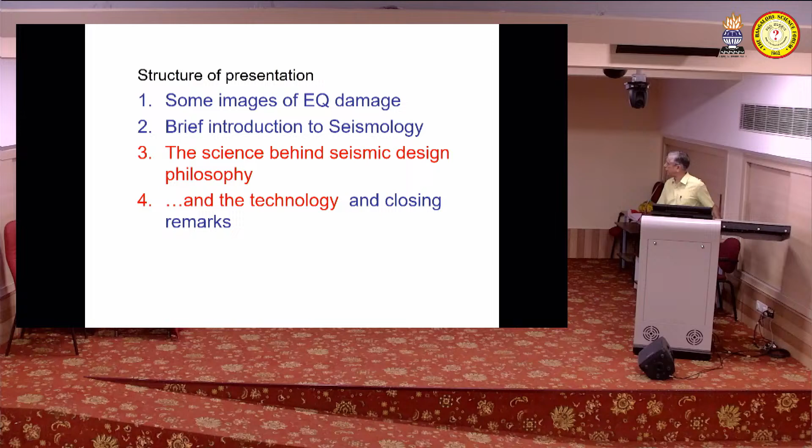So the structure of the presentation for the next 50 minutes or so will be sort of 4.5 parts, not exactly 4 parts. In the first part, I'm going to take you through some images of buildings and infrastructure which have suffered because of earthquakes. In the second part, I'm going to talk about a brief introduction to seismology, why do things happen like that. The third part, I'm going to talk about the science behind seismic design philosophy.

Of course, like any other science, this is also an evolving science. I'm going to talk about that in a little bit. There could be some technical content in the third part. And the last part is, once you understand the science and philosophy behind earthquake resistant design, you need to convert that into technology. After converting that into technology, it has to get disseminated and become useful for society. I'm going to talk about that in the last part with some closing remarks.

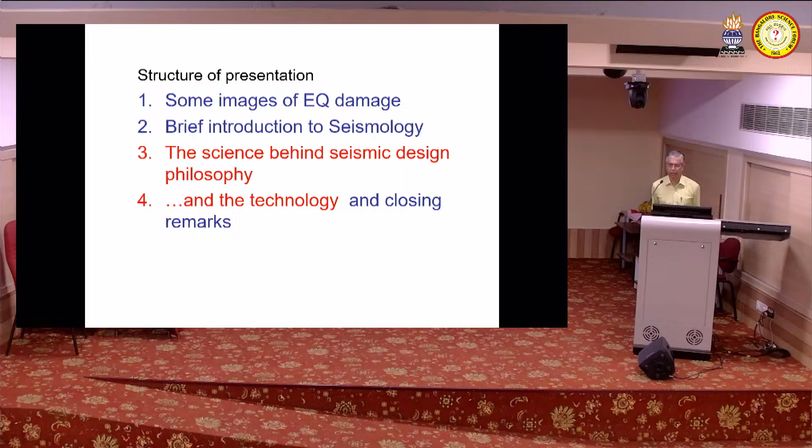So here we go with some images of earthquake damage. I have collected some images from very old earthquakes, from literature which is well documented.

Oldham was a pioneer in studying this, one of the classical earthquakes which happened in the earlier Indian subcontinent. The 1897 earthquake was completely documented by Oldham, Richard Dixon Oldham, in several of his treatises, books, and articles. Here is a picture of a school building, which was, fortunately, available both before the earthquake and after the earthquake, when it had become rubble.

There's absolutely no sign of any usage at all. It is completely devastated. We call that grade 5 damage. You can see the building in the foreground as well as the beautiful bungalow type building in the background. Both of them collapsed in a few minutes, quite literally a few seconds.

In fact, so devastating was this earthquake that it was called the Great Indian Earthquake of 1897. At that point of time, this was supposed to be one of the biggest earthquakes. Even today, it comes into the top 5 biggest earthquakes ever.

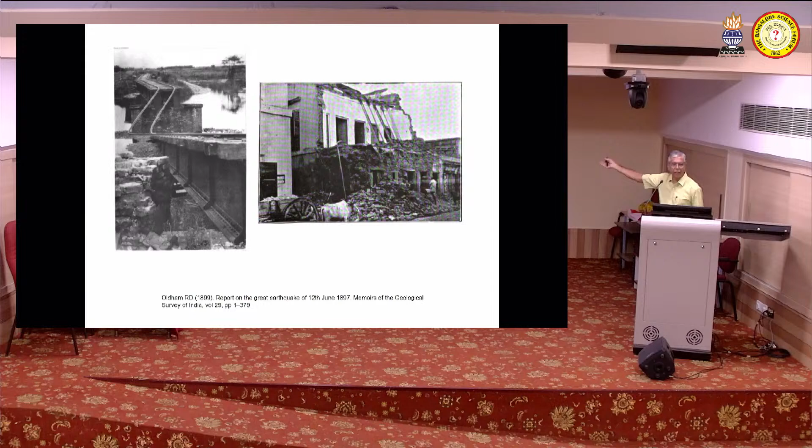He has also recorded quite a few things, and if you read the reprints of his diaries, you find some very interesting and devastating photos of railway bridges completely distorted, and you also see one masonry building completely damaged on the right side.

A few more pictures. The one on the left-hand side is a church, the All Saints Church in Assam. It was a well-known church - we have an All Saints Church in Bangalore as well. And then there was this collector's office, district collector's office, and you can see a beautiful building coming down to the ground. So these were all recorded during that earthquake.

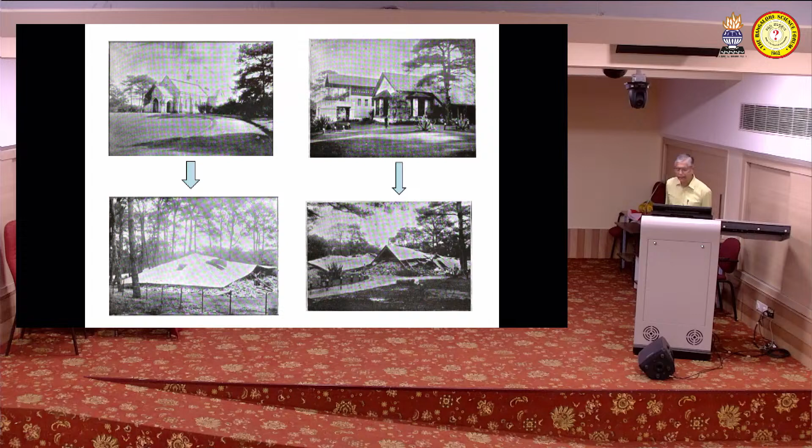Of course, when buildings collapse, they also cause fatalities. This is something which civil engineers should not be doing. I mean, civil engineers should take this as a challenge and then see that these things do not happen.

So now the interesting story comes here. A series of articles were written by Oldham and then later by Bilham and quite a lot of other Britishers documenting this. Unfortunately, in the year 1931, there was an earthquake in Bihar and quite a lot of regions in Pakistan, and of course some regions in the foothills of the Himalayas. A lot of buildings did collapse during the 1931 earthquakes.

They are called the 1930s sequence of earthquakes. During that time, there were railway engineers started by Britishers. One enterprising engineer by name S.L. Kumar took it upon himself, he and his team, to ask why don't we construct earthquake-resistant buildings?

At that point, they called it earthquake-proof buildings. They did a whole lot of studies and tried to understand how buildings behave during earthquakes, and then they tried to understand the materials, the configuration, and things like that. They came out with a very interesting report - in fact, I'm going to leave this presentation here, you can go through this.

There are about 20 pages of calculations and the engineering behind that, the science and engineering behind this. Even now we follow the same thing. His article was titled Theory of Earthquake Resisting Design, with a note on earthquake resisting construction.

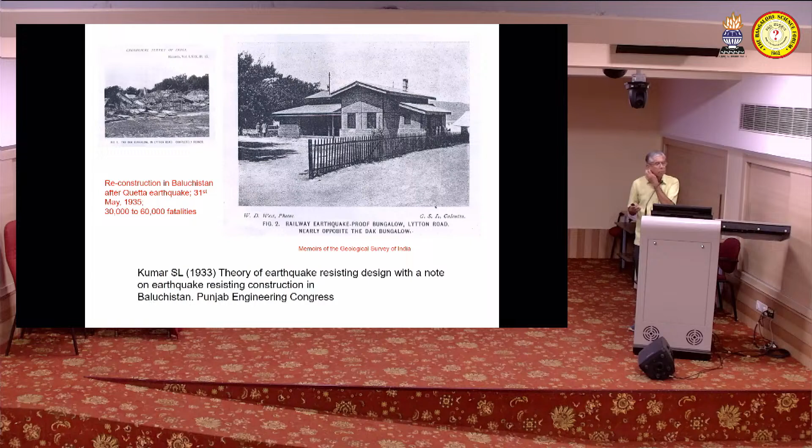Okay, so we quickly come to 1993, almost 100 years later. Of course, after the 1930s earthquake, 60 to 70 years later, there was this earthquake in Killari, the village of Killari in Maharashtra. The entire village just came down to rubbles. Quite a few people died, thousands of people died. Okay, so the entire village, Killari village, came into rubbles. They did not have absolutely any clue that there was something called earthquake-resistant design. This led to one very interesting thing: that masonry buildings are unsafe during earthquakes. At that point in time, the engineering fraternity thought that masonry buildings are the ones which are very, very vulnerable to earthquakes. Of course they are, but it took a very bad name. So that is the 1993, September 30th earthquake. We move on to the next major earthquake in India.

In a way, this is also another benchmark earthquake: the Republic Day earthquake of 2001 in Gujarat. Some statistics: nearing 170,000 people were injured. A lot of people died. People say that almost 90,000 people died. Officially, it was recorded as 14,900 people who lost their lives during that particular event. Later, within a span of another 1 week to 15 days, a whole lot of people died. So probably nearing 90,000 people died.

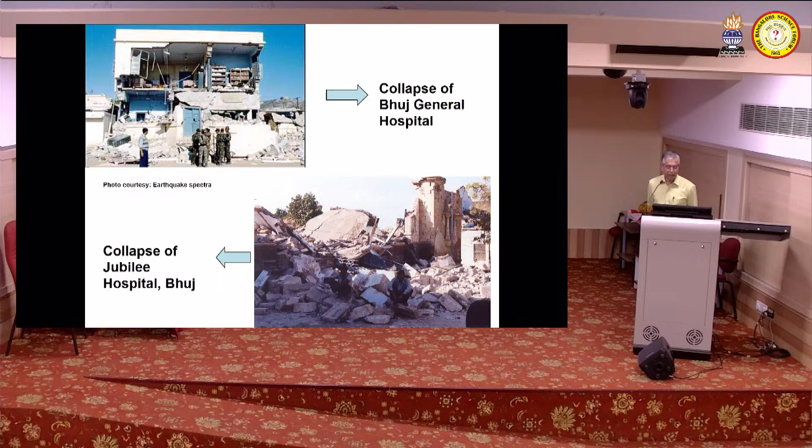Adding to the misery was that a lot of so-called modern structures also collapsed all over Gujarat. The kind of buildings which you say are fantastic buildings—these kind of buildings you see even in Bangalore, contemporary buildings in Bangalore—they collapsed. And these are the typical RCC buildings, they also collapsed. It's not that only masonry buildings collapsed. At this point in time, there was a furor in engineering that, look, RCC buildings are also as vulnerable as masonry buildings. So in a way, this was also a triggering point.

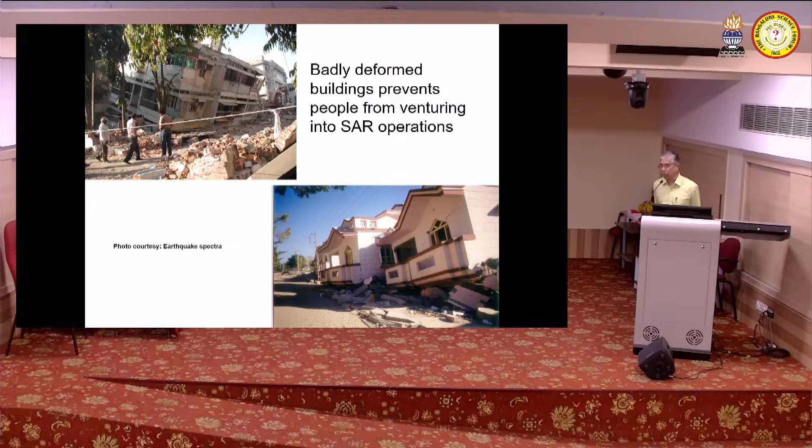There's something interesting which happened, I'm going to come to that very soon. Quite a few buildings had not completely devastated, but had distorted so much that search and rescue operations were also almost impossible. Many people lost their lives because people could not go inside the building to retrieve the bodies. We did not have technology to do that. Unlike in Western countries, they have a lot of technology. So this was quite devastating. They had to improvise a lot, and then some makeshift arrangements had to be done.

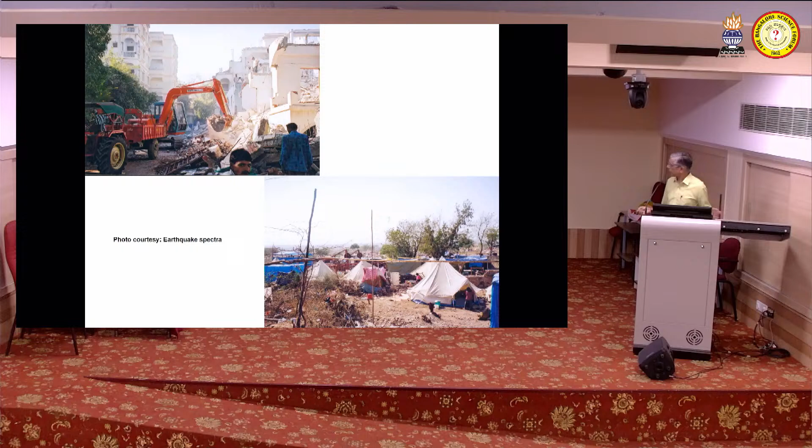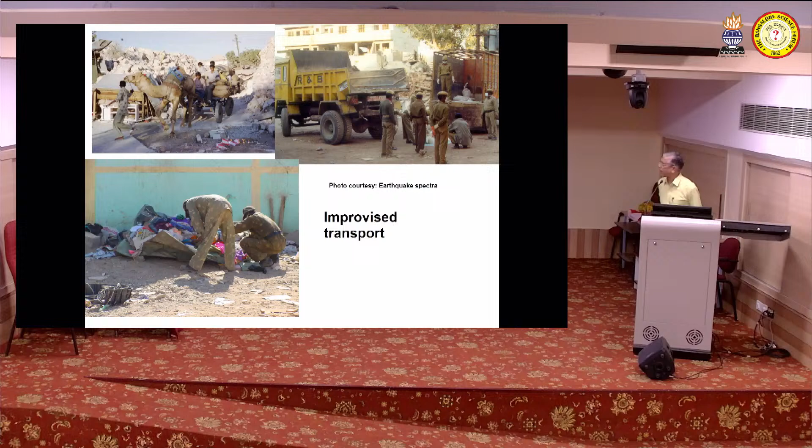Remember, this happened over almost the entire state of Gujarat. In a way, our nation was affected. These were some of the preliminary pictures from 1 or 2 days and 1 week later. Even I remember when we went in the month of March, even then debris were being recovered and some bodies were being retrieved. Generally, it was a problem for all sections of the population, particularly women and children. For a long period, they had to live in makeshift tents and things like that. It was very difficult.

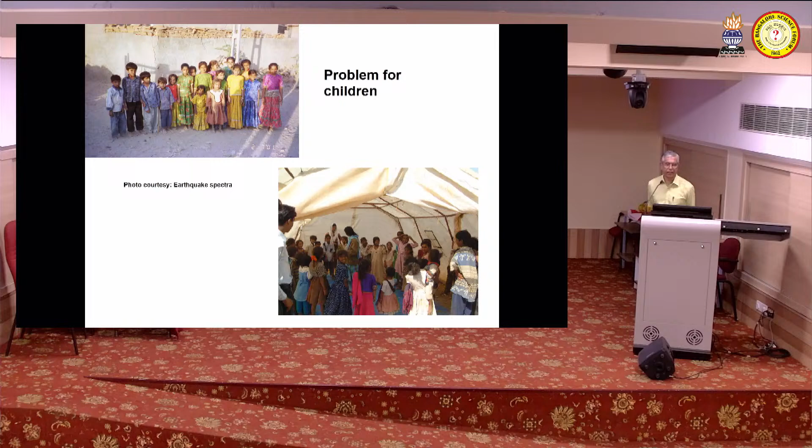Despite this, the beautiful thing is that a lot of surgical interventions were done in makeshift arrangements. Entire India responded to that earthquake. Socially, there was a huge amount of awareness among common people that this is not a disaster to be taken lightly, that it has to be taken on a national scale. That was when the Ministry of Housing and the Home Ministry took it upon themselves to come out with a major program called the National Program for Earthquake Engineering Education. That was a turning point in our earthquake engineering history, and a lot of students were sensitized about this. That is on one part, on the systemic level and at the policy level. At the ground level, something else happened: a lot of local engineers and architects started responding to the way the people understood about the buildings.

A lot of architects and engineers came out with their own innovative ways of understanding what has to be done and what should not be done. A whole lot of NGOs started—Varun is here, Hunnarshala was one of the premier organizations, Kutch Mahila Vikas Sangathan, CDAP, NCPDP, and many other NGOs in Gujarat. They started understanding earthquakes and earthquake resistant design and construction, and trained local masons, contractors and engineers, much before the government could do it on a systematic scale. So two things beautifully happened: organically NGOs started working, and the government also initiated a series of programs.

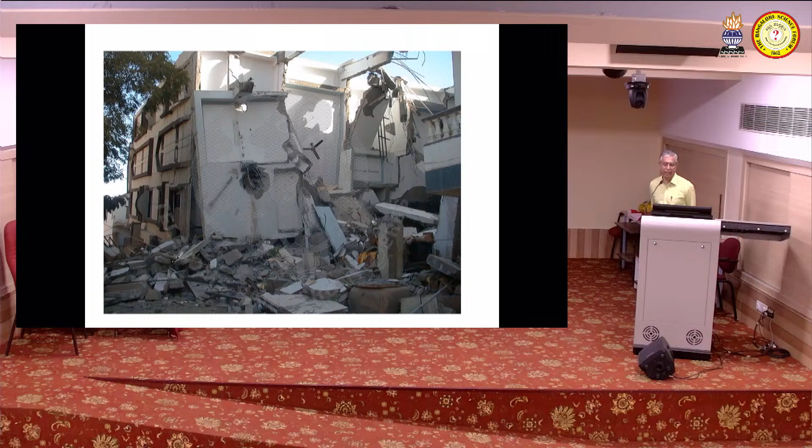When we went in March, we saw this building collapse. You can see it is turned by 90 degrees, completely fell down. I remember this building fell on the neighboring building, and 6 people in that neighboring building died. The people inside this building were rescued by puncturing holes—you see this fan, it's not a wall fan, it's a ceiling fan. This was the amount of devastation—a very modernistic RCC building, used to be a 5-storied building, has collapsed. The columns completely crushed, and it came down to rubble.

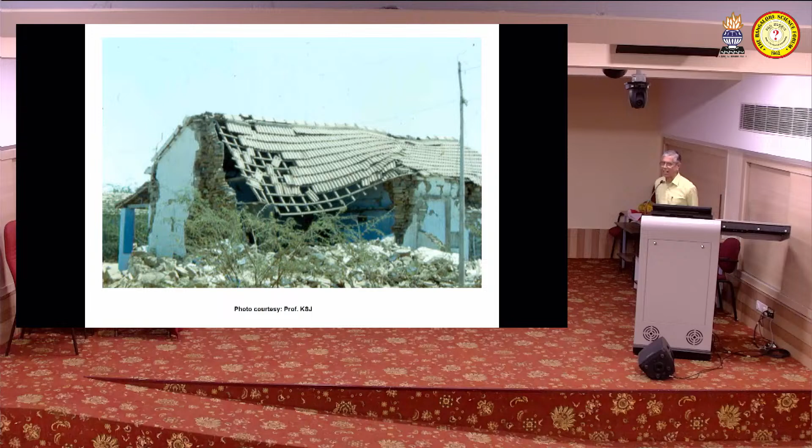People were there in Gujarat—Varun's teammate and Dr. Yogananda were in Khavda. A lot of masonry buildings also collapsed. Some of these pictures I got from them, and some others I got from a couple of friends from Nepal and New Zealand.

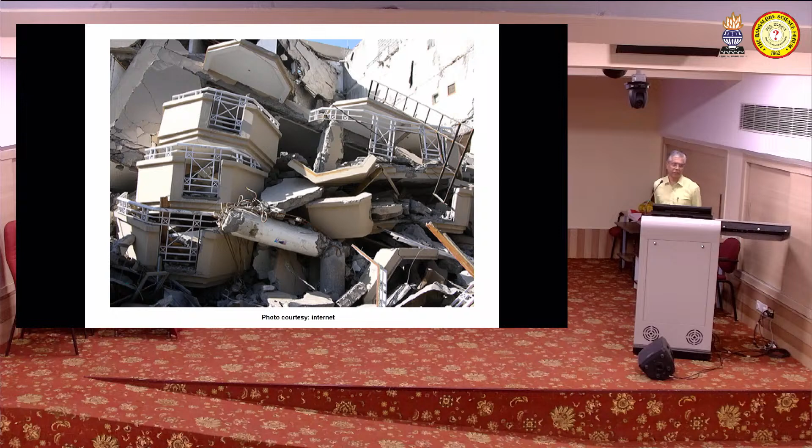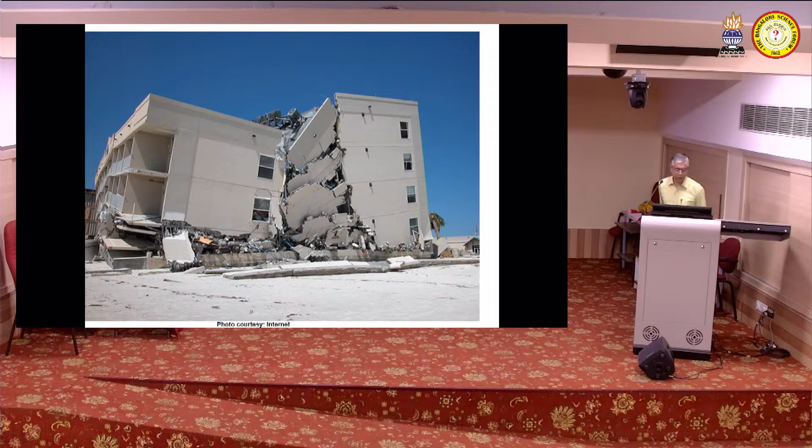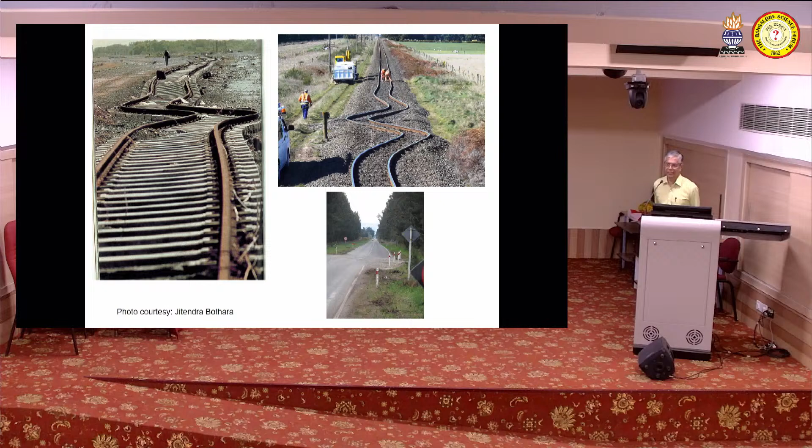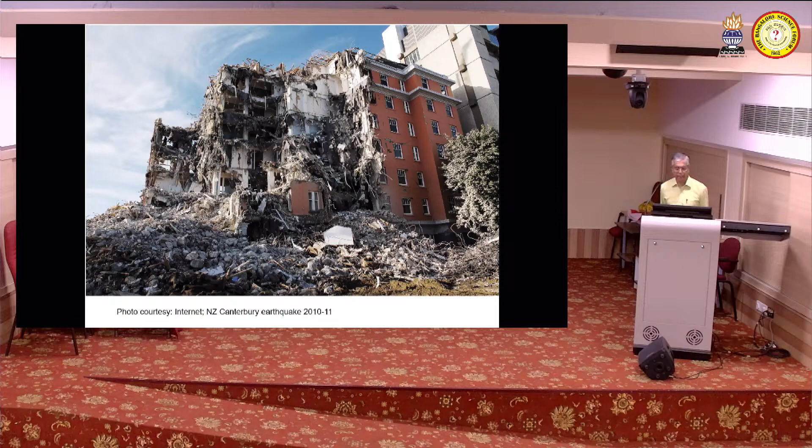So this was a building in Canterbury. Just like it happened in India in the 1930s, during 2010 to 2011 there was a series of moderate earthquakes, not major ones, in New Zealand. A lot of buildings collapsed, and many people migrated from Christchurch to Wellington and other places. They came out with a different type of solution for earthquake-resistant construction and policies—I'll come to that later.

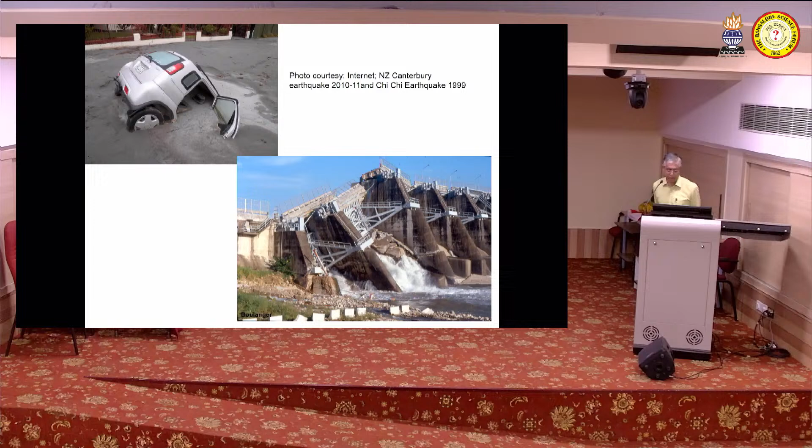This is from the Canterbury earthquake—people were seeing their buildings and vehicles go inside the ground because of a phenomenon called liquefaction during earthquakes. This is from the Chi Chi earthquake, showing damage to a dam, a water retaining structure. This is the Niigata, 1964 Niigata earthquake.

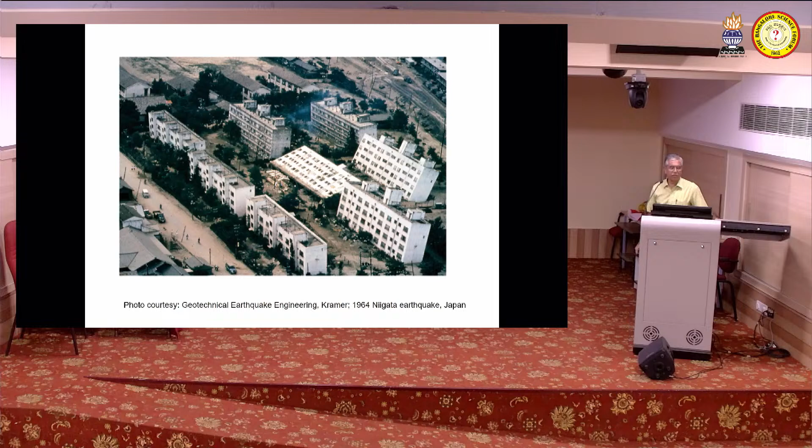This is the cover page of a book written by Kramer. All the buildings are intact, but the soil beneath the building converted itself into a sort of liquid—it behaved like a liquid and tilted, having no pressure or bearing capacity to withstand the load of the building, so it simply tilted and fell down. These are a few pictures. And lastly, I'll come to the fatalities—during the first half of the 20th century, nearly 8 lakh people died.

Many of them died because of collapse of masonry buildings, nearing 70% of the people. During the second half, between 1950s to 1999, 7 lakh people died, and again the share of people who died because of collapse of masonry buildings has not come down significantly. The number of people who died because of collapse of RC buildings, because RC was not common during that day, and unfortunately after 2000 till 2023, the number has doubled actually.

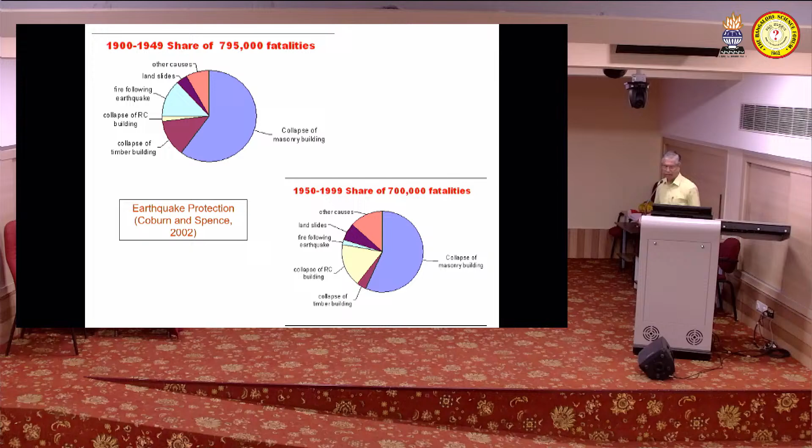That brings us to one very uncomfortable situation, especially for engineers. Have we learned something or have we not learned something? The answer is yes and no. If we have learned something, then the fatality should have come down. So where does the answer lie? That's something we need to ponder. I'll come to that during the last part of my lecture.

So this was about... I was trying to sensitize you people about how earthquakes are very devastating. Sitting in a place like Bangalore, we have not even felt a tremor. Apart from traffic jams and then garbage and water logging and things like that, we don't find any problems in Bangalore as such.

So just imagine you're walking in a street and all the buildings have collapsed. It's unimaginable, the kind of psychological damage it causes. And one person died in your street, it causes some distress. Several people died in the street, it is something which is unimaginable.

I also remember when me, Vijendra, and my professor went there, when we saw the pictures, it was one level of understanding of how buildings behave during earthquakes. When we went there, it was a totally different thing. For people who have experienced those earthquakes, it was really a huge psychological distress. Whoever survived those earthquakes, they would have undergone a huge amount of agony.

So the answer to, should we learn something about earthquake engineering - the answer is emphatic yes. There's no two ways about it. You have to learn, you have to understand, you have to move forward. You have to disseminate the technology.

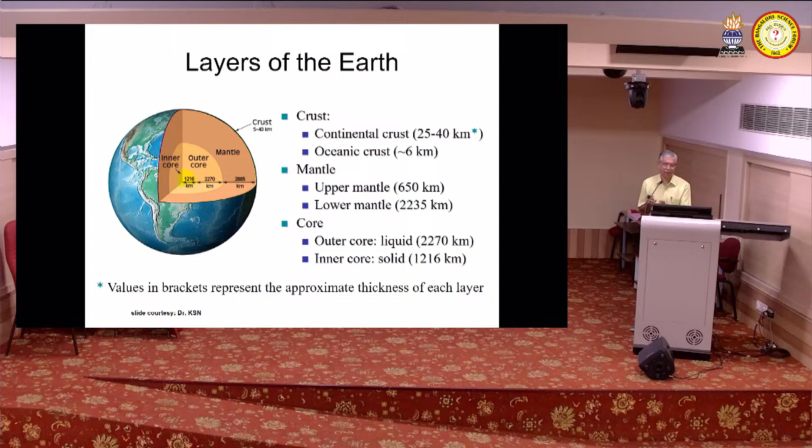There's a huge temperature gradient, thousands of degrees centigrade. And because Earth is moving and revolving and things like that, the surface of the Earth, the crust, though it is solid, there are a lot of fissures, like the cream on milk - quite literally that. In terms of scale also, we are living on the thin cream of this crust. It keeps moving relative to each other.

So the major two reasons why earthquakes happen: one is volcanic activities, the other is tectonic activities. This is the one which is most devastating in the sense that volcanic activities - you know which are the active volcanoes, which are passive, which can become active and things like that.

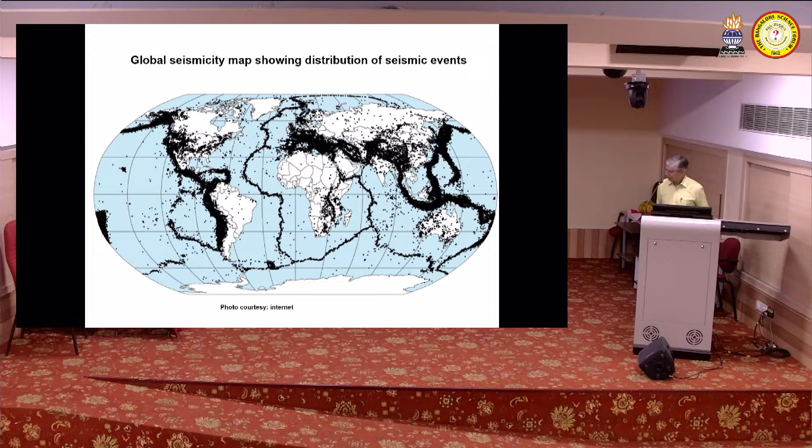So this was the one which was propounded by Wegener, and it's an accepted hypothesis. It's an evolving science.

So a lot of evidences. In a schematic diagram, two tectonic plates push against each other. It could be in the form of compression, shear, twisting, or tension. So they move against each other, and huge amounts of strain and strain energy are accumulated.

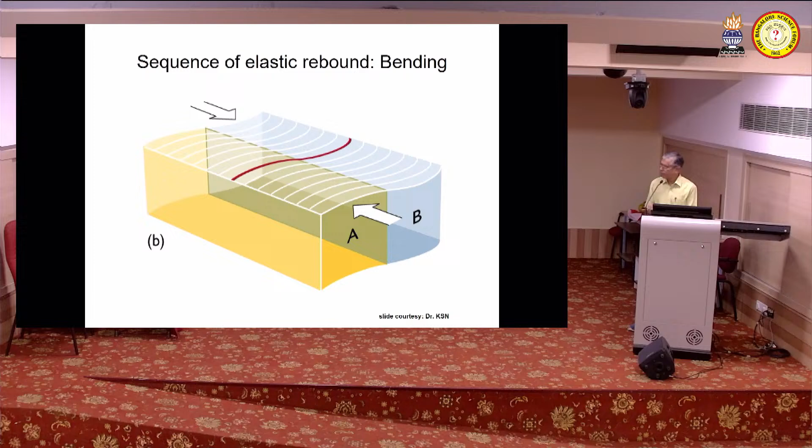At one point, suddenly it snaps, and that huge amount of accumulated energy releases, several kilometers beneath the surface of the earth. Where the first point where the energy is released is called the focus of the earthquake, and the point where the projection of the focus onto the surface is called the epicenter.

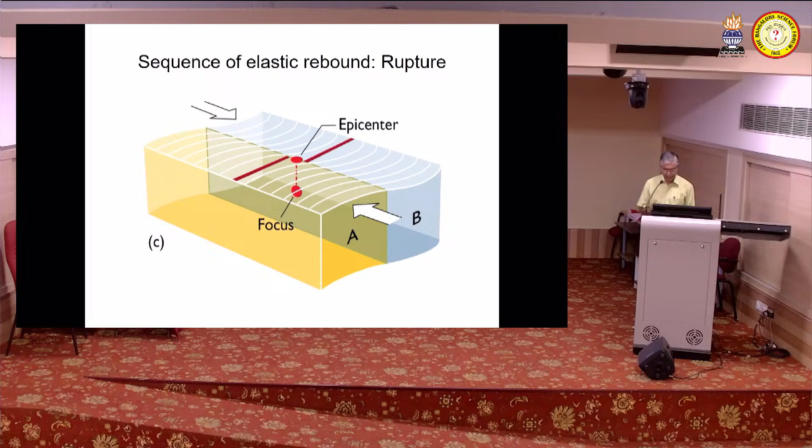Now, there's a huge amount of energy which is released. Normally, when energy is released, it gets converted into other forms of energy, or it has to dissipate. Unfortunately, in this case, because the source of energy is deep beneath the surface of the earth, it has to get transmitted through seismic waves. So how it is going to get transmitted is very interesting.

There will be waves which travel, just like dropping a rigid object on a still surface of water. When you drop that, the kinetic energy of the stone is converted from potential energy, and once it hits the surface of the water, the energy has to be dissipated into other forms. It creates ripples. Exactly the same thing happens here.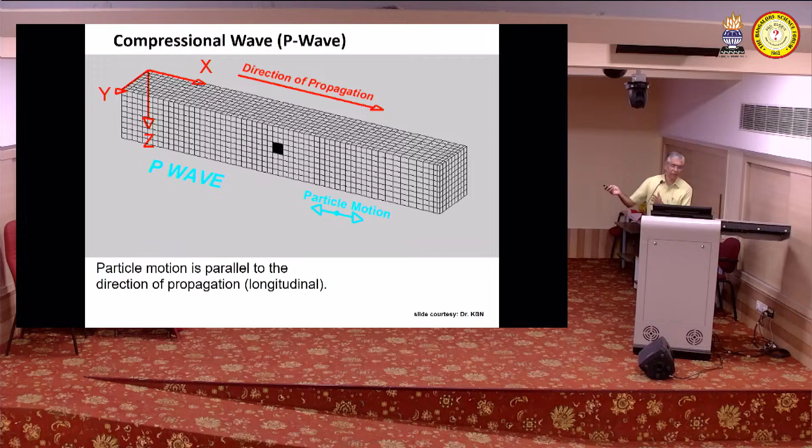The strain energy is converted into some other form of energy, and it has to get transmitted in the form of waves. It can't get transmitted in the form of light and sound waves, though sound also emanates, but mainly it has to be in the form of seismic waves. There will be what is called compression waves. A small animation shows how the waves travel through the surface of the crustal layers, and these are the shear waves.

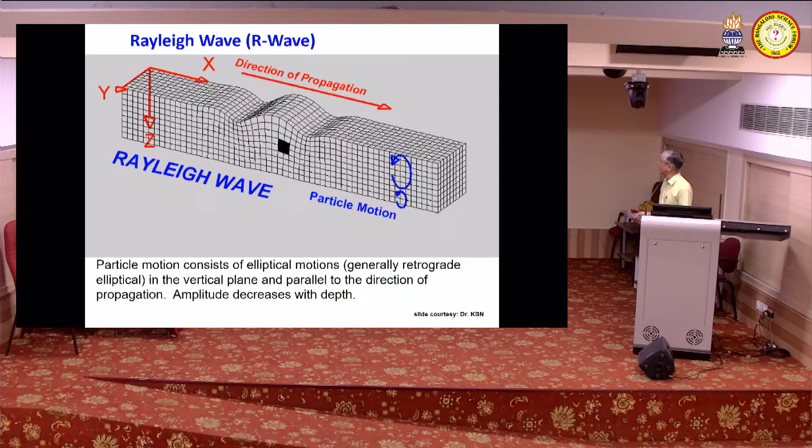And once it comes to the surface, there will be what is called a Rayleigh wave, and then there is this twisting type of motion called Love waves. So this is what happens on the surface of the earth. The buildings and the infrastructure constructed on top of the crust have to endure all these things.

Civil engineers are fantastic in designing structures for all types of loads which are static in nature, dead load, live load, and nearly static in nature. We can also design structures for wind loads, settlement loads, fire loads. Talk about any loads, we are very good in designing structures for that. We know how to make a structure rigid, strong and stable for all configurations and all combinations of load. But unfortunately, earthquakes cause what is called a dynamic load on the structure. This is a challenge for civil engineers.

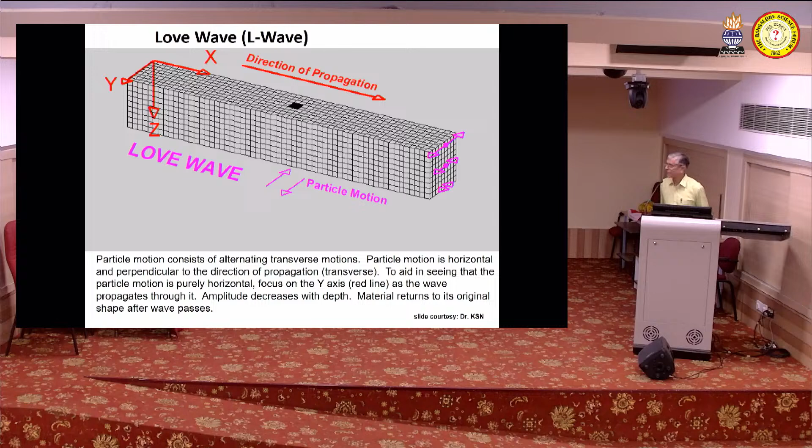A small digression away from this: in fact, understanding of the structure of the earth has happened because of earthquakes. We would not be knowing the structure of the earth had there not been any earthquakes at all. An exciting phenomenon, and of course for civil engineers it's a dreadful thing. So we use earthquakes to locate the earthquake, and we use earthquakes to find out the structure of the earth, things like that.

So to sum it up, this huge amount of energy is going to be transmitted in the form of seismic waves. These waves are going to cause ground vibrations. You saw the ground vibrating, the pictures of the ground distorted. The buildings and structures situated on the ground are going to shake. How are you going to handle that ground shaking? That's what we need to understand in the next part.

Of course, again a little bit of digression in terms of understanding the size of the earthquake. There are two scales.

One is called the magnitude scale. What is the amount of energy which is released during an earthquake? That's called the magnitude of the earthquake. How much damage has it caused to the infrastructure, to the people? That's called the intensity scale.

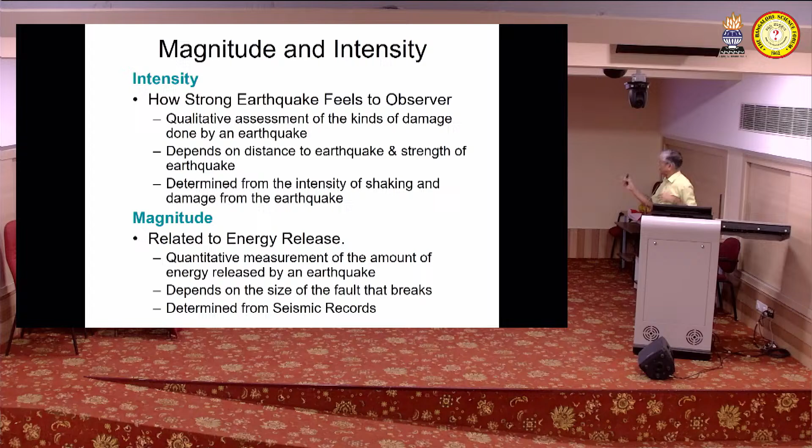Of course, intensity scale is qualitative. It depends on how badly the infrastructure is there, how proximal the infrastructure is to the epicenter, and how far away it is. Whereas magnitude scale is popularly used by geologists and seismologists to tell the amount of energy. So bigger the magnitude of the earthquake, larger is the amount of energy, there's no doubt about it. But for civil engineers, both of them are not of significance, unfortunately.

So moderate earthquakes are not so very common. Major earthquakes are even less common. It is the moderate earthquake and the major earthquake which we need to keep track of. So that understanding of science, where earthquakes happen, what is the size of the earthquakes, which are the places more prone to earthquakes, and things like that, has helped our engineers.

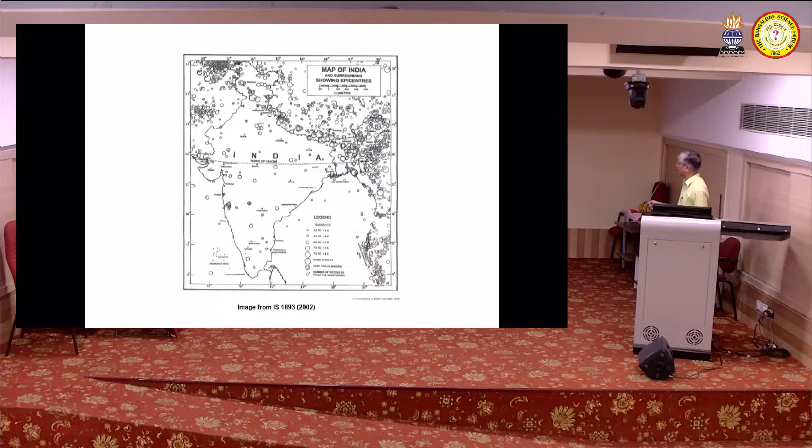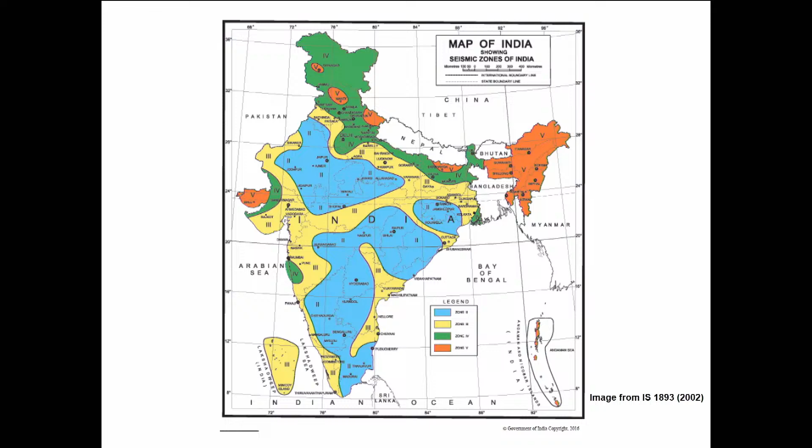One very interesting thing, if you look at the map of India, these are the places where earthquakes have happened, and automatically the seismic zoning map of India comes. So it's very easy. One of the first lessons you have learned, or intuitively can say, is don't construct buildings in zone 5, construct buildings only in zone 2. But that's not possible. You need to have buildings even in zone 5, zone 4, zone 3, and zone 2 also.

So we are comfortably sitting in this region. Again, this is an evolving map, it keeps changing after every earthquake. Fortunately, much of southern India is under a safe zone. So the size of the earthquake and where it happens, how frequently it happens, has helped us in giving one level of understanding about the input parameters for earthquake resistant design.

What the civil engineers are worried about is how the ground shakes. The ground is going to shake, going to get displaced, and rapidly it's going to get displaced - when I say rapidly, it's a relative term. The ground is going to start moving laterally in both directions, and there will also be a motion in the vertical direction. There will be 3 components of the earthquake - you can call it longitudinal along the longitude, along the latitude, and along the axis of gravity. There will be 3 components of the earthquake you need to handle.

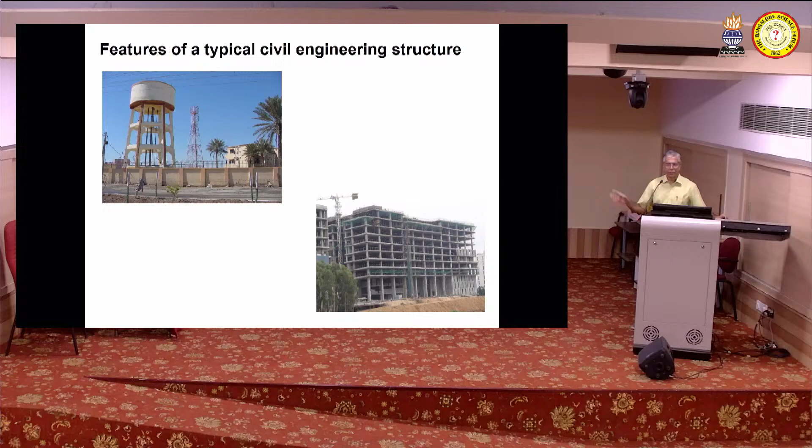Whether it's a multi-storied building, an educational institution, or a hospital, you find something very important. If you strip these photographs of all visual characteristics and quantify them in engineering parameters, every civil engineering structure has got a huge amount of mass. The amount of mass we're going to use is unimaginable. Try to understand the mass of this National College—it's unimaginable.

Probably you can tell: a 1000cc car will weigh about 800 to 1000 kgs. A two-wheeler may weigh 125 or 150 kgs. A bicycle, 20 kgs. A locomotive, 100 tons. But buildings weigh several thousands of tons.

It's a huge amount of mass, and it doesn't take a lot of understanding to know that when mass is subjected to inertial forces—mass multiplied by acceleration gives the inertial force—so even if the acceleration is small, because the mass is very large, that's a huge, unimaginable amount of force.

That was the reason you saw one of the photographs where the flyover had completely tilted. There's a mass subjected to inertial force, and it started moving, and the poor spring wasn't capable of taking that—the columns weren't capable of taking that amount of force at all.

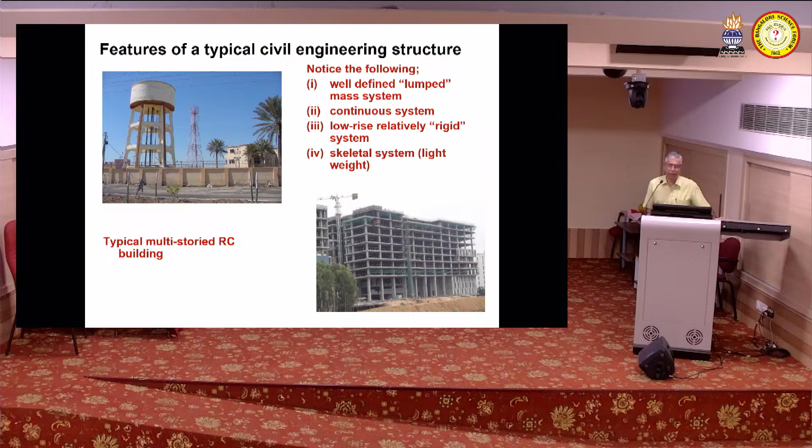All these supporting systems we call the springs of the system, or the load-bearing elements, and of course we also have supports or boundary conditions—commonly called foundations—to give stability to the structure. These are the five bulleted points present in every civil engineering structure: you'll have mass, which receives the acceleration and converts it into inertial force—kinetic energy.

That kinetic energy has to be transmitted onto the spring, which will deform, converting it into strain energy. You have to design those springs to withstand that amount of strain energy. Of course, the springs fall under the load transferring components.

From the roof it comes to the beam, from the beam it comes to the column, from the column it goes onto the foundation, and so on. There is connectivity of elements, and while forces are being transmitted from one component to another, you should see that they all remain intact.

It's just like if you try to pile cards—you just blow on it and it falls down. So you need a lot of interconnectivity between elements. It's not good enough if each behaves individually in a proper manner; they should behave well together.

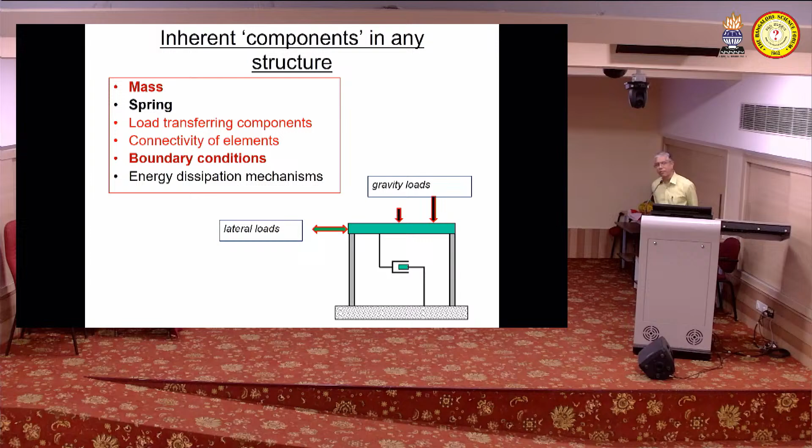There is also this energy dissipation mechanism, so structures do not keep vibrating for an infinite amount of time. Fortunately, structures have the ability to dissipate energy. For the sake of completion, I've included this—mass, spring, and damping.

At this point we have adequate understanding of this part of engineering. We now have a lot of computational tools to analyze a building, no matter the complexity. We know how to categorize the building, how to analyze it for any complex load, and you know there are three components of the earthquake: the X component, Y component, and Z component.

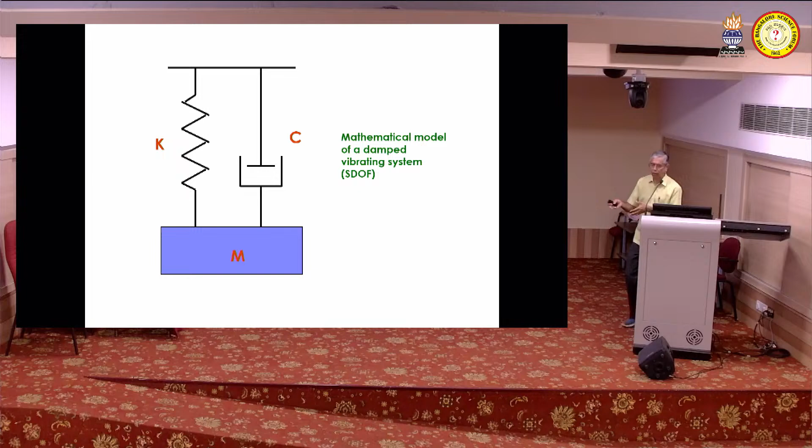So we have got a lot of tools today to understand how the structures are going to behave. This has also evolved a lot. Parallelly, there is this understanding of materials, how materials behave during earthquakes.

Every material will have a lot of inherent properties. There are about 6 different properties: strength, stiffness, energy dissipation mechanism, deformation capabilities, and so on and so forth. Fortunately, the understanding of materials is also there with us now.

Civil engineers have, over several decades, understood how materials are going to behave. For example, ask any civil engineer: cast iron is very strong in taking compression but very brittle. Timber is very good in compression and tension, it's lightweight, but it's hazardous for fire loads. Steel is a fantastic material. Masonry is a very vulnerable material to withstand lateral loads. So this amount of understanding is there now.

Over a period of time, civil engineers have spent a lot of time on research to understand material behavior. Now, how are we going to aggregate or integrate this understanding of material behavior with how the building is going to behave during earthquakes, and bring in a philosophy to come out with earthquake-resistant design? This is what we need to understand.

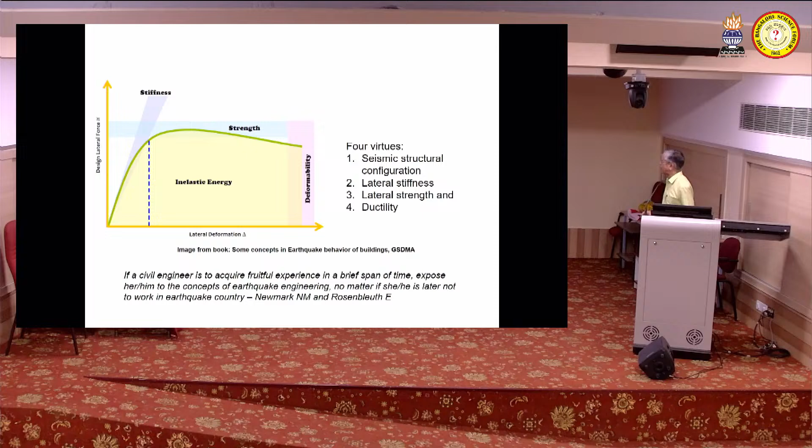So when the mass is subjected to inertial force, it is going to be transmitted onto the spring. It's going to deform. When it deforms, it's going to crush, whether it is steel or concrete or timber or wood, it's another matter. But there will be some amount of failure. You need to handle this.

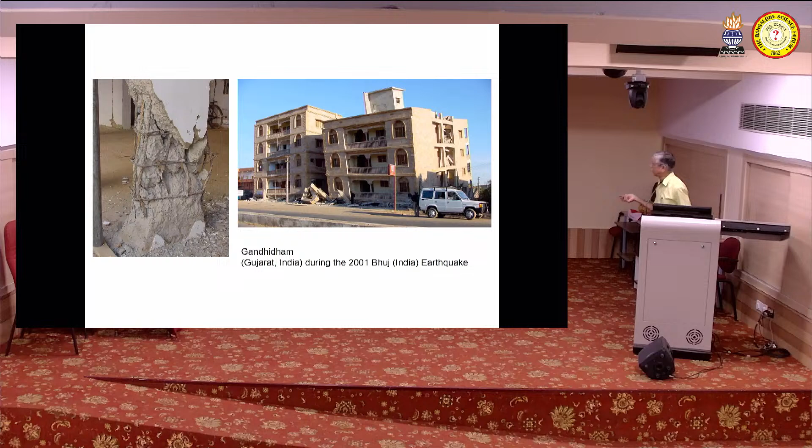You also see one more picture of a devastation. So broadly, you can put this as a bulleted point.

The second approach is very interesting: is the mass the culprit? Try to reduce the mass, use lightweight materials. But when you want to use lightweight materials, you can't have multi-storied buildings, it's not possible, and you can't have bridges and dams and things like that made with lightweight materials. It's a dream for civil engineers to come out with lightweight materials.

Which is never going to be achieved at all, it remains in the dream. I'm not really sure in the next 100 years or so we'll ever be able to come out with such a lightweight material.

Now, very interestingly, the philosophy is designed something like this. After each seismic event, people started understanding buildings and earthquakes much better and better. In a way, it's much like a doctor's profession: after a disease, they start understanding the disease better, at the cost of the patient of course. COVID happened, and a lot of doctors understood this. Just like that, at the cost of the buildings and then society, we learn a lot.

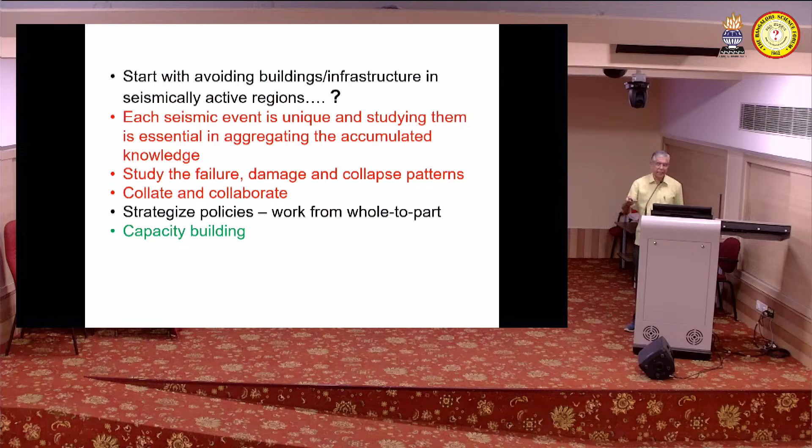Strategize policies, we work from whole to part. Understand the building typologies and patterns and demography of India—where is the population, what type of building. It has to start from whole to part, and then build capacities. You need to train engineers, masons, barbenders, contractors, all of them, to build the capacity to translate that philosophy into technology, into practice.

So the next 2 or 3 slides might be a bit technical, but doesn't matter, otherwise it will not be complete. When you take this PPT and read through it, it's not difficult to understand. When you design this typical building, we design it for a particular load capacity and add factor of safety, and ensure that the deflections and things like that are not beyond certain limits.

We are going to impose that—you don't go beyond certain limits. That is called the serviceability limit state. So this is what we are going to design normal structures for non-earthquake loads, for all loads except earthquakes.

During an earthquake, it's not a common phenomenon, especially in zone 2, zone 3, and even zone 4. You will allow for certain amount of damage to take place. For a moderate earthquake, you allow for some non-structural or structural damage which you should be able to repair and reuse easily.

If there is a major earthquake, no matter what, you don't want collapses, which you saw from the 1897 example up to 2001, and probably even now it is continuing. So the design philosophy is like this: the bottom line is, no matter what, loss of life of people is not allowed. That's the bottom line.

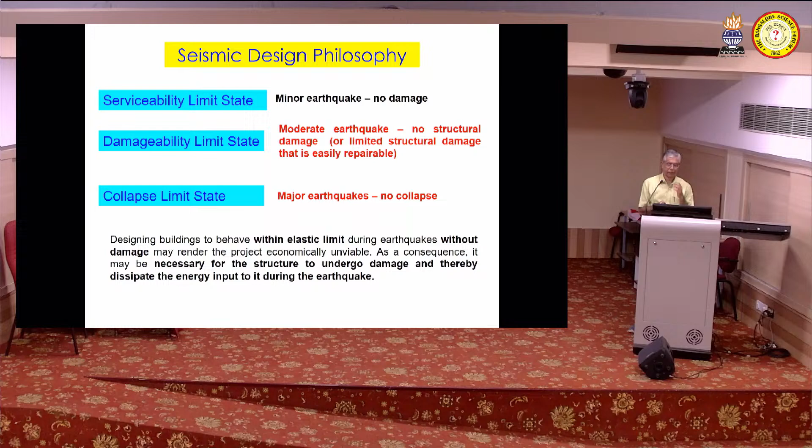As far as possible, prevent properties from getting damaged. These are the two bottom lines for civil engineers: no matter what, buildings should not collapse—whether it's a major or minor earthquake, whether using masonry, timber, bamboo, thatched roof, mud, or whatever, whether in zone 3, zone 5, or wherever. As far as possible, the property should not be damaged. This is the design philosophy, put simply.

Now, given that earthquakes are not such a common phenomenon, you don't want to pay a huge premium to protect against them. If you invest a certain amount on a building and design it in Bangalore by paying about 30% more premium for earthquakes that aren't going to happen, it's not a worthy investment—you won't get any returns out of it. So the design philosophy becomes a bit more complicated.

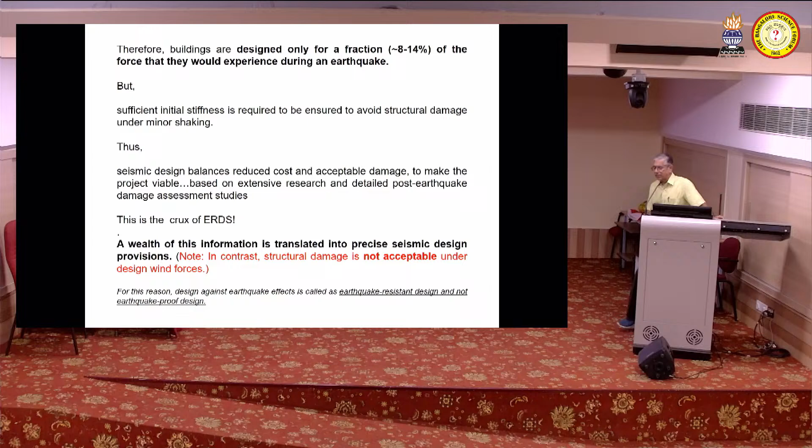So civil engineers have come out with a very interesting approach—this is a challenge they took head on. They said: no matter what, we'll allow the structure to withstand the earthquake forces, we'll allow it to get damaged, but we'll ensure it does not fall down. So they started working on that, and that's how the technology is now evolving.

So now, if you go to any Western countries, or even in India, a lot of new modern buildings are designed for earthquake forces. God forbid an earthquake should happen, but if it does, trust me, buildings designed per this philosophy might suffer a little damage—the property may not get destroyed, and people will certainly survive. This is the crux of earthquake resistant design.

So how do we apply that? There's a small catch—you don't use this philosophy for all buildings alike. Certain buildings like hospitals, telecommunication systems, and very sensitive structures like nuclear power stations and railway buildings need extra care. You need to ensure management of such infrastructure stays easy after an earthquake—you don't want a hospital to lose functionality. For facilities like dams and nuclear power plants, you must ensure no catastrophic secondary damage occurs.

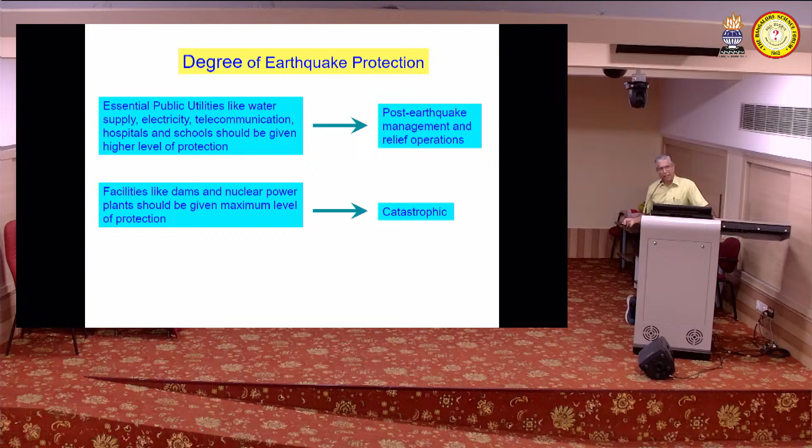So embedded in this design philosophy is also this consideration. Now the design philosophy is firmed up, and there's enough understanding of structural behavior during earthquakes. To sum it up, for a non-engineer, you can think of it as a relationship between input and output. Input—what factors do you consider?

It depends on the location of the structure—whether it's in seismic zone 5, 3, 4, or 2—and what type of ground parameters, whether it's an active fault or passive fault, and so on. Ground motion parameters are a complete topic in itself. Also important is to what level you want the protection. These are the input parameters. The output parameters are very interesting.

This is very interesting in the sense that civil engineers are going to control how the building is going to respond during an earthquake. So how the buildings respond depends on the importance of the structure. Institutional buildings are more important, residential buildings less important, cycle stands and vehicle stands and things like that less important.

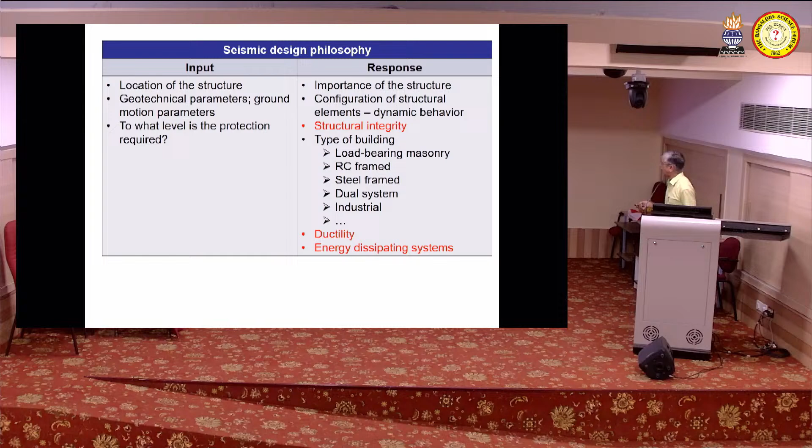What type of building is also very important: load-bearing masonry, timber, or steel combination, things like that. And how much energy you will be able to dissipate, and what is the amount of ductility - these are the two engineering parameters. I'll try to explain that in a very simple manner. Let me see how I'll be able to convey that.

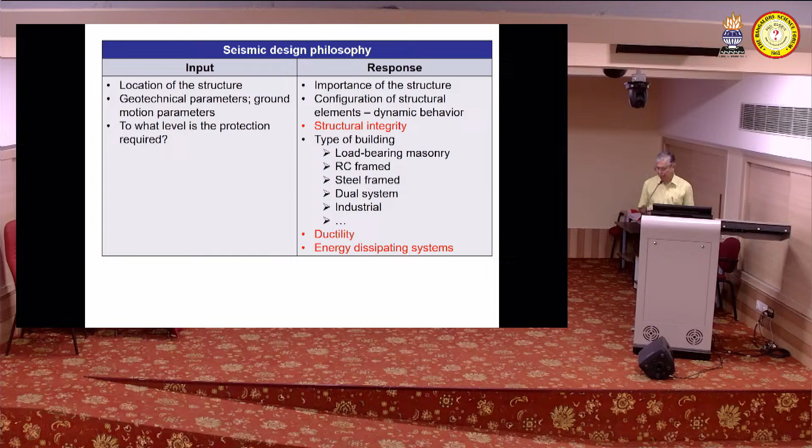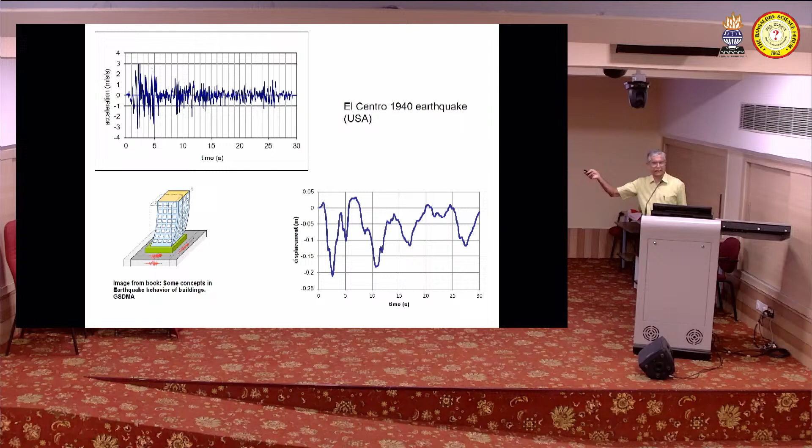To sum up, now we know the understanding of ground motions. We know how to quantify every parameter of the ground motion: maximum duration of the earthquake, frequency content, dominant frequency content, peak values, peak ground displacement, peak ground velocity, peak ground acceleration, everything we know. And what happens when a building is subjected to this kind of earthquake, we know how - which point will be subjected to what amount of deformation, what amount of stresses and strains and things like that.

So over a period of time, several earthquake records were collated all over the world, and then we came out with a very interesting design parameter called the response spectrum. Of course, as I mentioned, this is one of the few slides which are very technical in nature - probably even civil engineers find it difficult to understand.

So for the science graduates here, something very interesting is there's a very unique type of graphical representation. It has got four scales - one on the x-axis, one on the y-axis, one at 45 degrees and one at 135 degrees. It's called a tripartite graph.

Knowing the dynamic properties of the structure, the natural frequency, therefore the natural period, we will be able to know how much inertial force it will be subjected to, how much deformation it will be subjected to - in a single plot you will be able to see this. Embedded in that is the statistics - how much it might exceed in the event of a building situated in zone 5, apart from zone 4 and things like that.

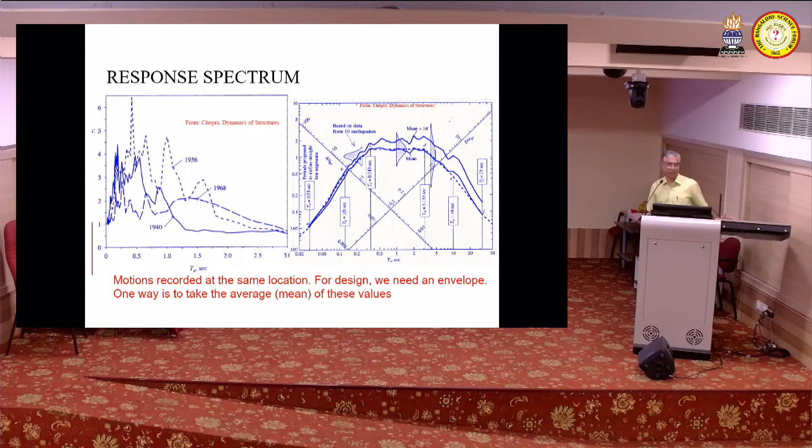That part of the science is also converted into technology now. So now there is this complete firming up of all the things which are very formidable for civil engineers. So we have come out with this design response spectra.

Lastly, I want to come to the closing part. Now, knowing why the earthquake happens, how it has caused damage and fatalities, and why you need to avoid that - so we have also categorized the sort of type of building it should be. This is not a wish list, by the way.

We want structures to have high strength to weight ratio. We want masses to be lesser. We want structures to have good deformable characteristics, but at the same time we don't want it to be so flexible that during a non-earthquake event it keeps swaying like a tree. We can't do that.

It should have low degradation - it should not degrade quickly. The connectivity between all the elements should be there. And it should come - this is the bottom line, literally the bottom line - at a reasonable cost.

You do all the things and it comes at a high cost for the building itself, nobody is going to practice this. It's just like asking somebody who is walking to wear a helmet - people driving two-wheelers themselves don't wear a helmet. Asking somebody sitting in an auditorium to wear a helmet to protect their head is not going to happen. It's a very complicated policy decision which we need to take.

So the priorities - of course satisfying all of them is the steel structure. The least one is inversely proportional: the one which is more damaging comes at a reasonably low cost, masonry structures; the one which is most costly comes at a high cost - steel structures, RCC, precast, and things like that. We also have the priority ordering for earthquake resistance.

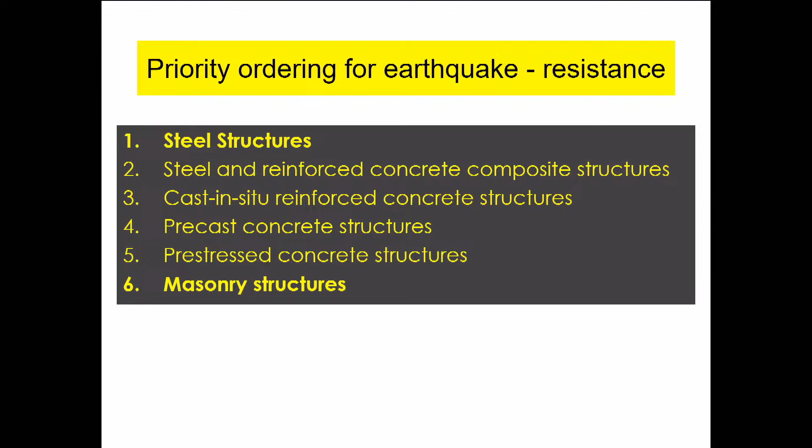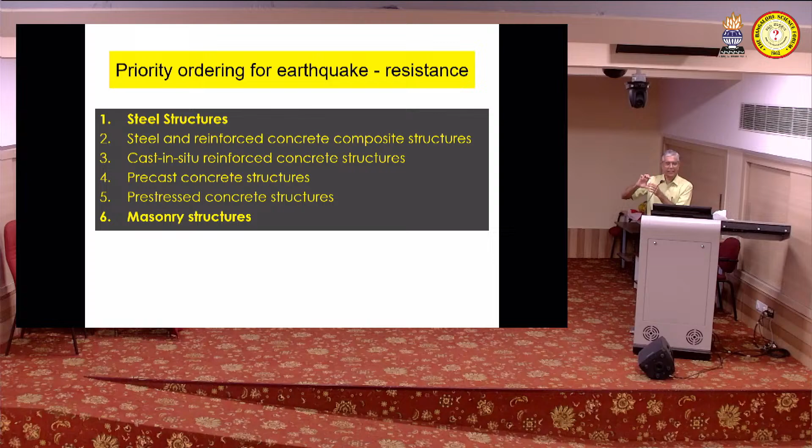You know, this is a very interesting, this is a chalk piece. It can take a huge amount of compressive load, but it's very brittle. The moment you apply load, it's going to break into 2 pieces. It's quite strong in compression, but very poor in tension, and it cannot withstand any lateral load itself.

Now, given this, how are you going to impart earthquake resistant feature into this? This is the challenge which civil engineers faced. So you can see that, in fact, if I drop it, it's going to break into 2 pieces. How civil engineers have come out is very interesting.

Now I'm going to apply forces. You can see that it is not broken into 2 pieces. You can actually see this. I can throw this, I can hit it, it does not break into 2 pieces. So we have retained all the essential characteristics of the building if it were not subjected to earthquake.

If it is subjected to earthquake, it's going to happen like this. It does not collapse and kill people. Unlike this thing, it's going to break and collapse. So this is the input of civil engineers to this society.

Don't think that a lot of people, there is one way of thinking that a lot of people have died during earthquakes. At the same time, a lot of people have not died because of these things during an earthquake. The way you are going to look at earthquake resistant design and construction is you have to turn it over the other way. So this is called ductility, deformation capabilities, and energy dissipation mechanisms. So this is the one which is imparted.

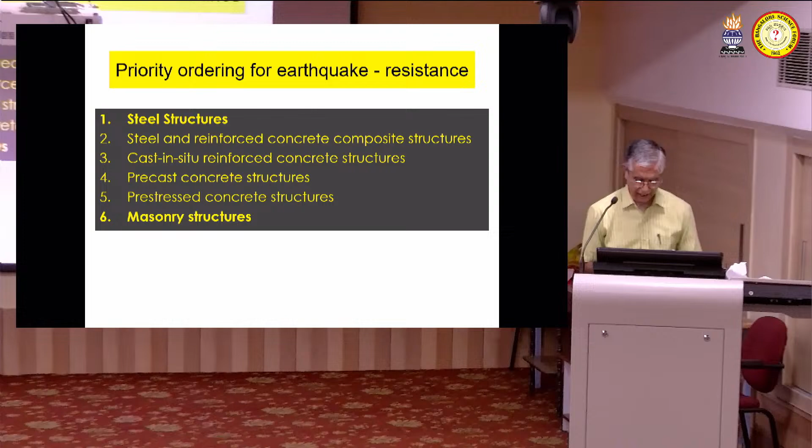So if it were a masonry building, all you need is a small technological intervention to make this happen. To sum it up, there are 6 virtues in a building: good seismic configuration, adequate lateral stiffness. It should be strong in withstanding lateral forces. It should not be very flexible. If it were very, very flexible, all buildings will behave like trees. It should have adequate lateral strength.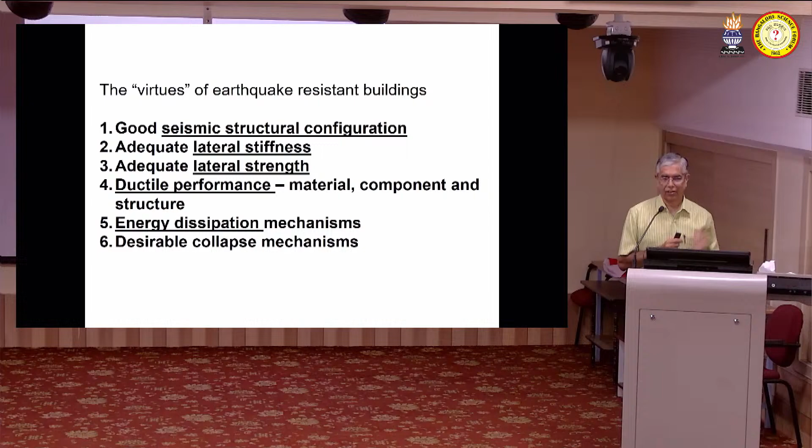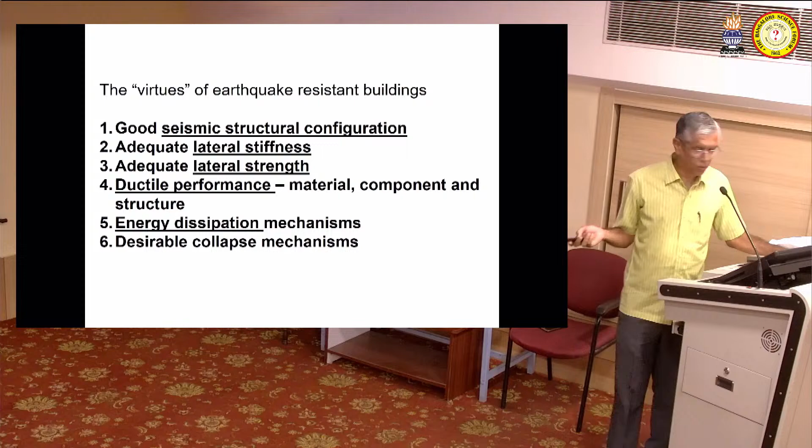It should be ductile. It should dissipate energy, and if it is going to collapse, it should give enough amount of warning to the people, to the inmates, telling that, look, the building is collapsing, please come out. And you can see the building which is going to collapse. So this is how civil engineers have worked out the strategy. I feel this is a very interesting, formidable challenge just taken head on, and today we have come to a state where we can get all these things.

So this is a recap of what. And how are you going to translate all these things? It has come out in the form of monographs, codal provisions. And you see, this is a code book, earthquake resistant design of structures. This is a 2016 edition, 2023 edition, 2024 edition has already come out. A lot of people have written books on earthquake.

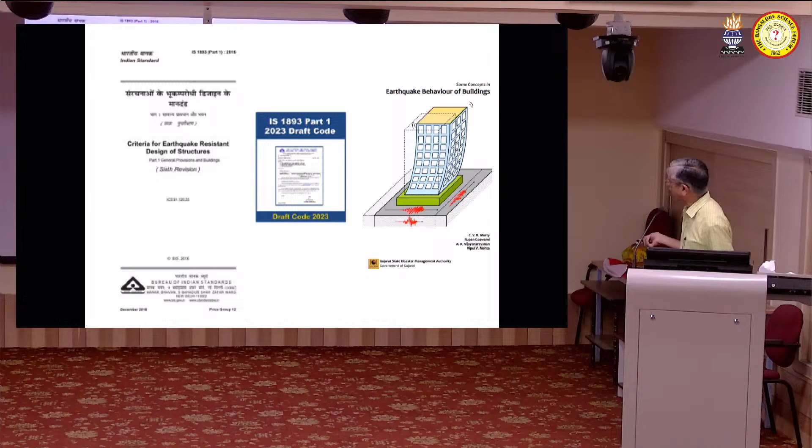There is this national program on earthquake engineering education. Engineers are trained for this, sensitized, and there are a lot of professional bodies training this. There is this National Information Center for Earthquake Engineering. A lot of people have written books in local languages for people to understand in a pictorial manner, not really in a numerical manner. It's not that you always need to use software to come out with an earthquake resistant feature. A lot of representations are there.

And then there is this National Disaster Management Authority, NDMA. We have also come out with some guidelines. Look, if this is the kind of building, this is what you need to do. We are there to help you out. We'll ensure that you are going to follow those things. So this is the broad overview of earthquake resistant design, protection of buildings for earthquakes. I will show you all these things in a small capsule of the next few slides.

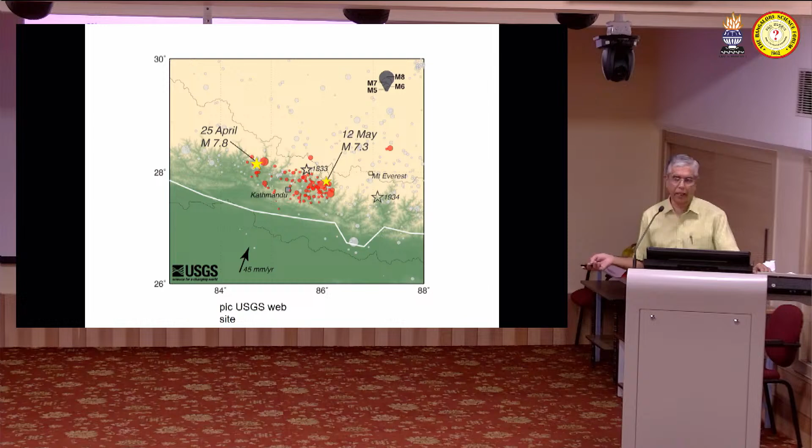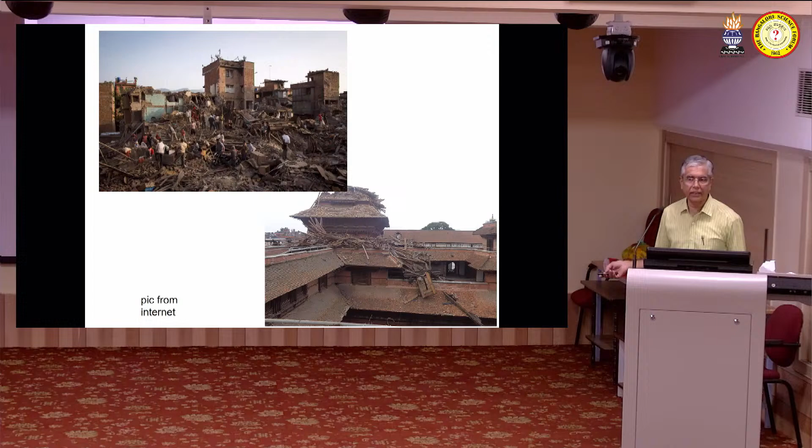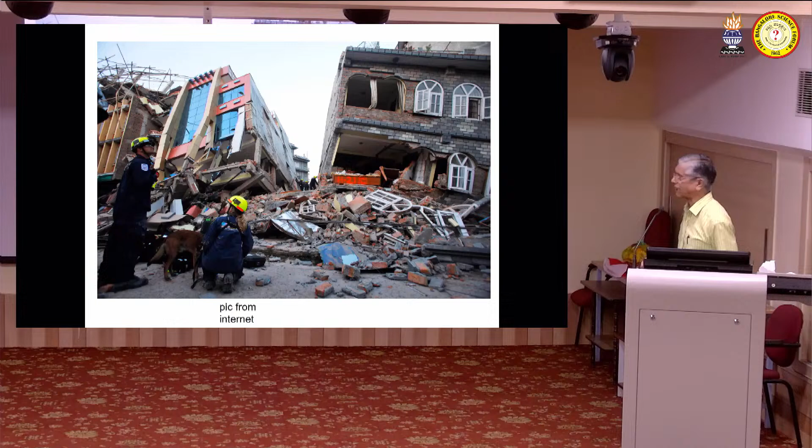In 2015, there was a series of earthquakes in Nepal, between 25th April and 12th May. A lot of buildings got devastated, and you see the kind of damage caused, including historically important structures, monuments, and temples. Fantastic, beautiful structures collapsed. It's a general condition of the surroundings in a street, a typical densely populated region sitting in seismic zone 5.

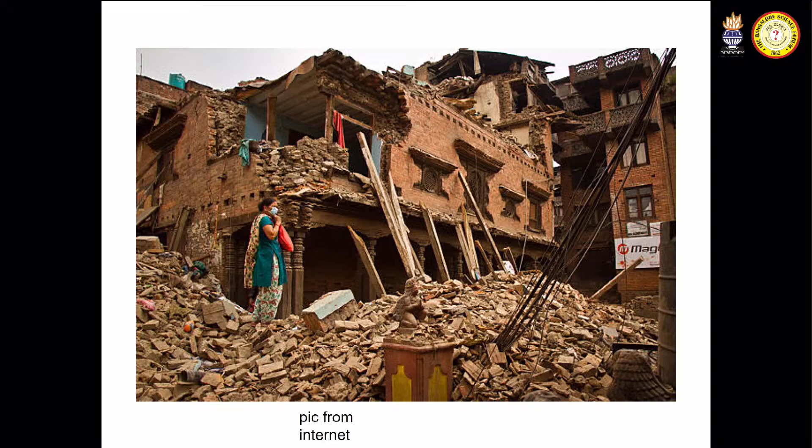This is the kind of thing that happened. By the way, there is a picture where I saw people wearing masks, before the COVID era. So this was 2015.

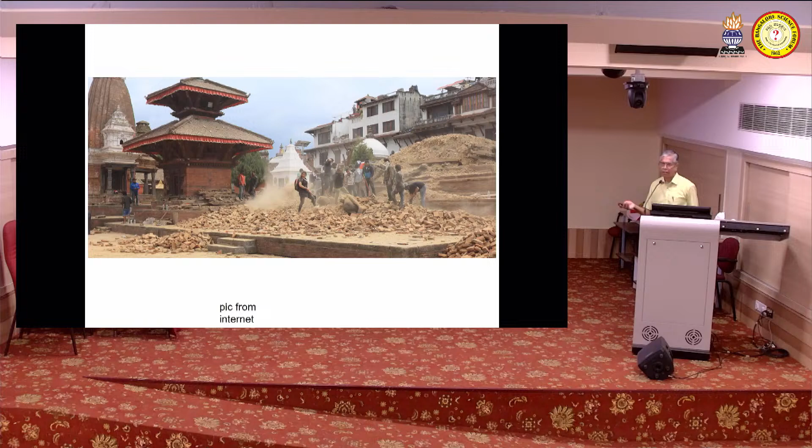Something very interesting I want to tell with this picture: earthquakes, unfortunately, cause a lot of fatalities and damages, but they also bring society together. Unknown people help unknown people. It's one of the natural disasters where unknown people help each other without knowing one another. There are a lot of videos showing random people helping each other during an earthquake. This is very important for us to understand—it happens in any disaster. When, God forbid, there is an accident, people will come and help you out.

So people came. Interestingly, for our neighboring country, the first people who went to Nepal and started helping Nepalis cope with this distress were Indians, from Gujarat—people who had experienced a bad earthquake themselves about 15 years back. They flew to Nepal much before Nepalis themselves could understand how to solve this problem. A lot of people went there—you see Rajendra Desai training people—and they went to the remotest parts of Nepal, bringing earthquake resistant technologies and telling them in their own language: look, this is how you need to construct. You are building with mud and stone in mud—it doesn't matter, don't change this, we can make your structure resistant to earthquakes. A lot of people came.

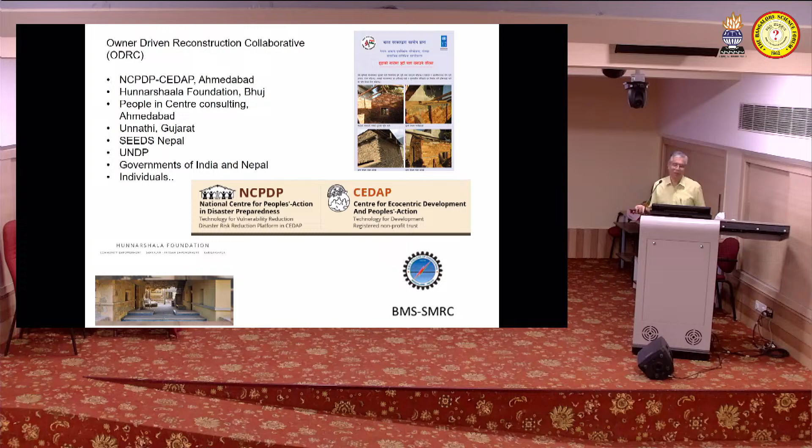Fortunately, I was also associated with this through my former college—first time I'm telling this, rather second time.

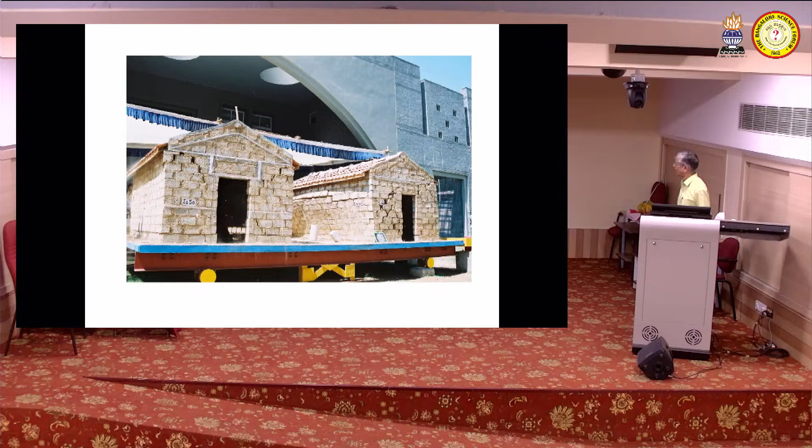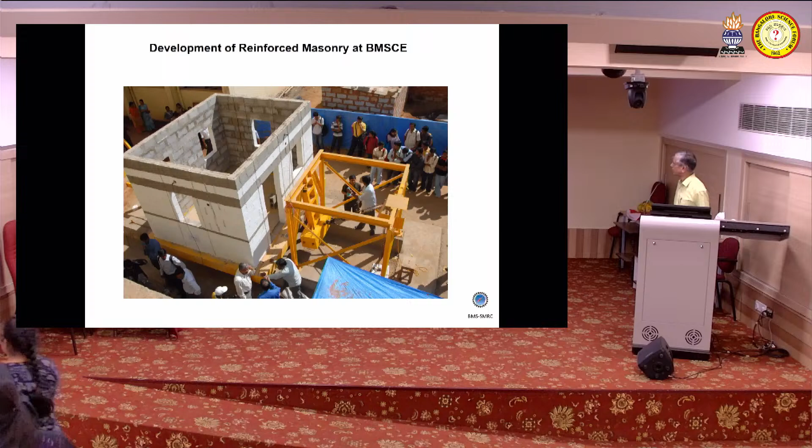So there are of course a lot of questions asked: you are telling people these things need to be done, but how are you going to validate it? This is the last part I'm going to tell. It's not that everything is done on computers, calculations, and papers—a lot of laboratory facilities are there too, for instance this one at BMSCE. There are also a lot of training programs, where you train people and tell them: look, if you construct your building like this, it will withstand an earthquake; if you don't do this, this is what will happen.

With that, I close my lecture, with these four takeaways.

Earthquake forces are quite complex, and handling them is a challenge, and we now have a complete section of professions to handle them—a complete understanding. Earthquake resistant design philosophy is based on shared knowledge and evolving science. That's another major outcome.

Civil engineers play a crucial role—if not civil engineers, who else can do this? Nobody else. They are responsible for this and have been playing a responsible role, and this is very important. God forbid there could be a day when all engineers are IT engineers—if you don't have earthquake engineers, or civil engineers, it's a very dangerous thing.

Practicing earthquake resistant construction requires a multidisciplinary approach, and a lot of policy matters have to evolve. With that, I'm ready to take any questions if there are any. Thank you.

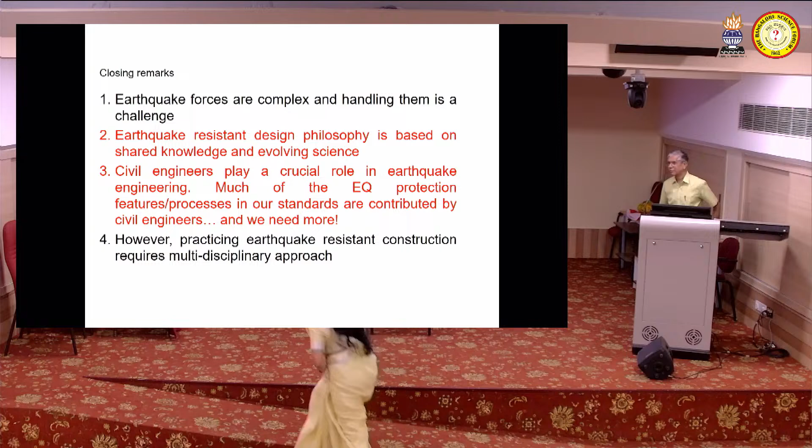Last two men in the musical chair.